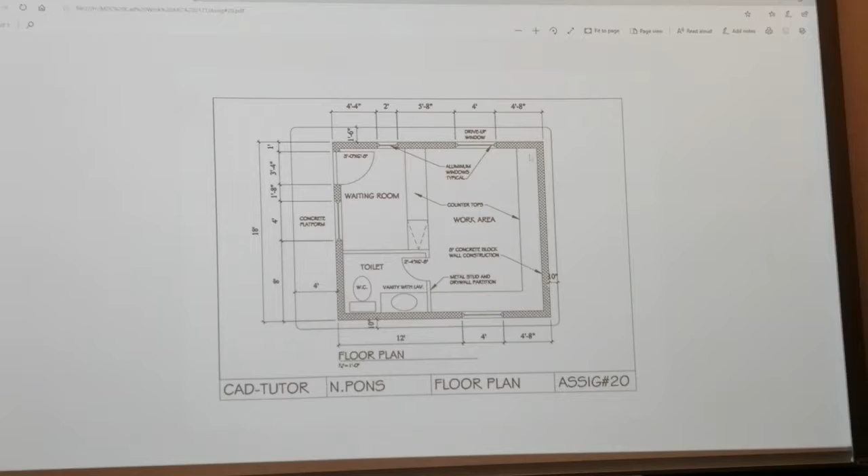This tabletop is 24 inches deep, same as this preparation table, 24 inches deep, which is 2 feet. This door you see is an upfolding door. The dash line means the hinges are on the narrow side of the line here.

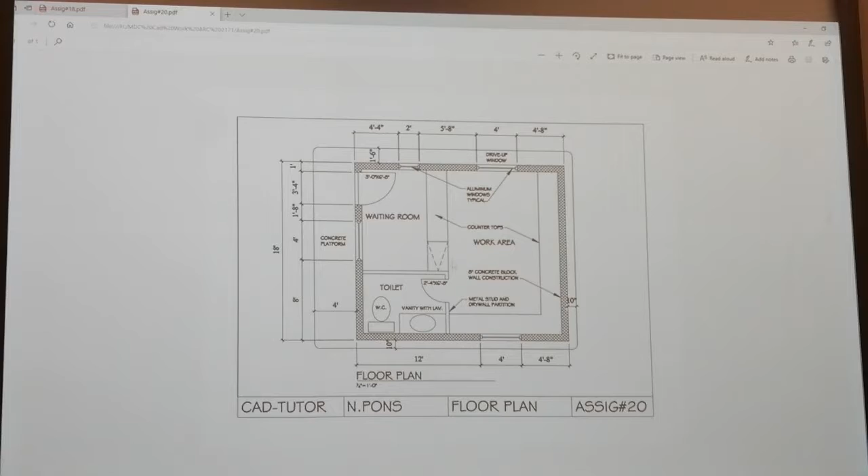So this is two feet deep by 3 feet long. What is 2 feet deep by 3 feet long? Can you print it so we can have it, the one door? Yeah, you'll have everything. Okay, and then you need to put dimensions.

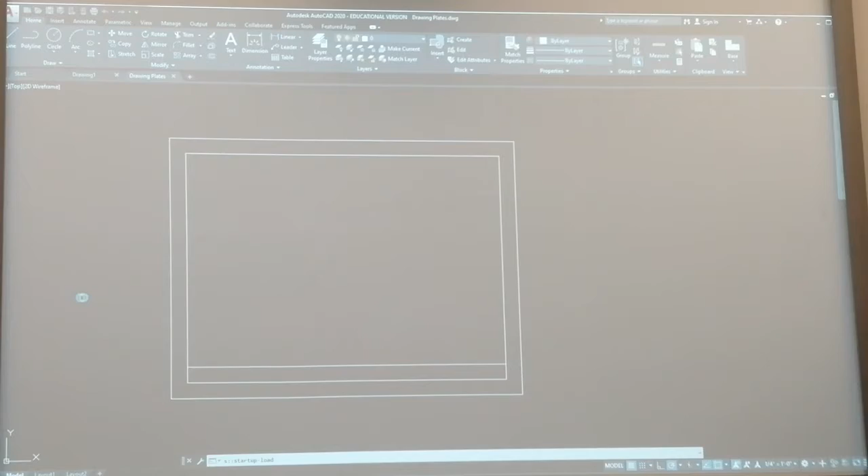Now let's take a look at the actual CAD of this.

I'm gonna put some dimensions here that you're gonna need to do. Can you all see? White, black and white. We're gonna put some dimensions here that you'll need in addition to all this, so I just set up my OSNAP settings here.

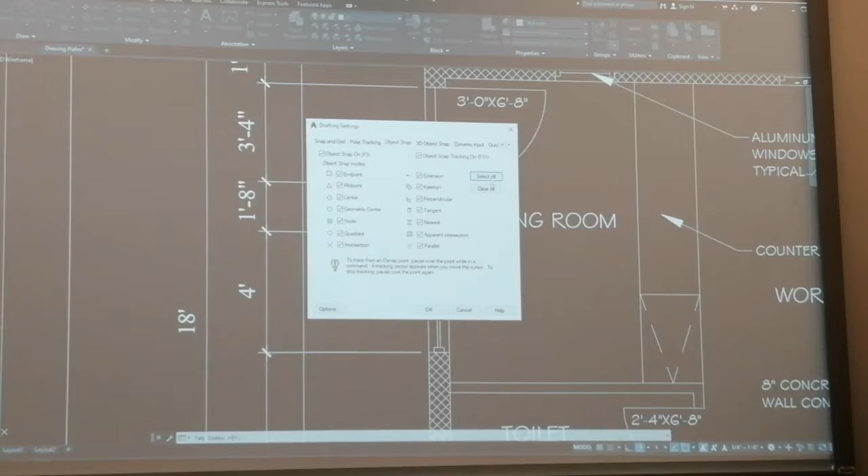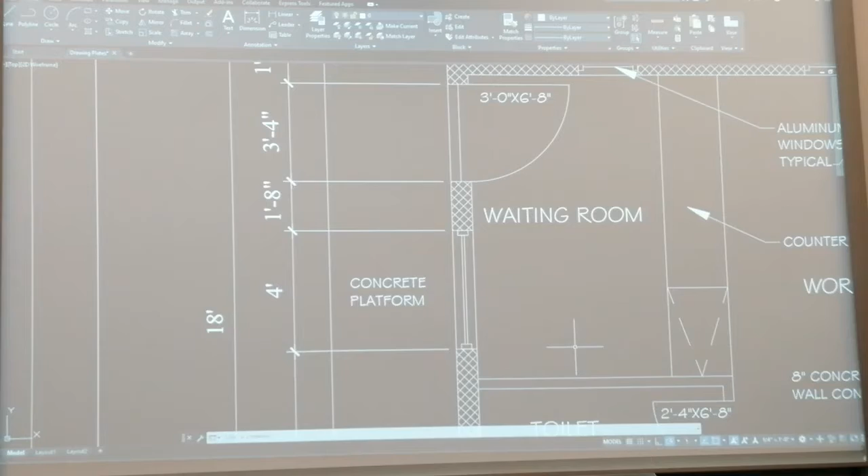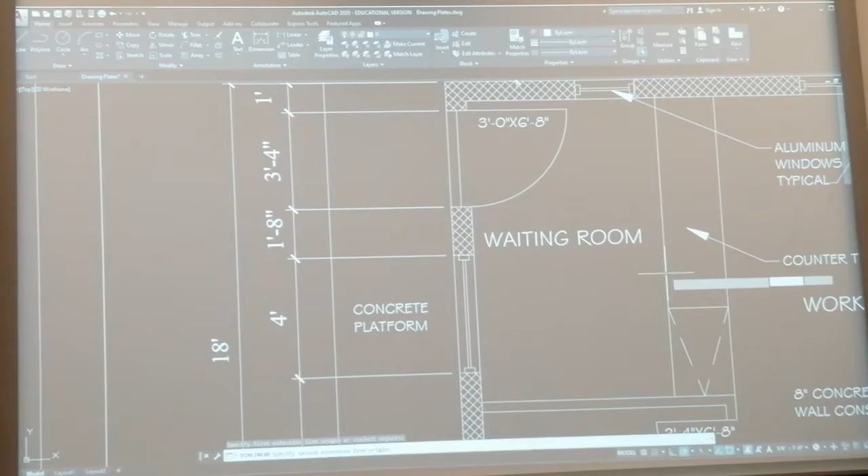Do you all have classes next Thursday, the 5th? No, wait, the 8th. Make sure you check, because I think that day is a conference day and there's no classes. Check with your department chairman, okay? Thursday the 8th. Not in the evening? All evening classes are rolling. Well, I gotta check and let you know. Our class is on Wednesday, you guys have to go, but I'll check anyways. These internal affairs and time off don't actually get put on the academic calendar from admissions or the registrar's office, so you won't see it on my syllabus. We never get told about this.

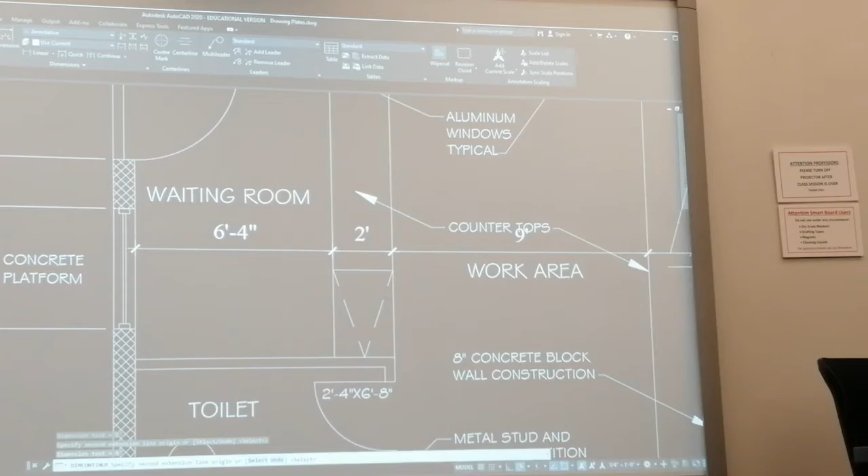Going back to this, I'm putting some dimensions here so you could have it, and you're gonna need to have it. You could see what I'm doing.

See a situation like this, never put the text over the number, okay? Never do that, that's a no-no. I'm gonna move this text here.

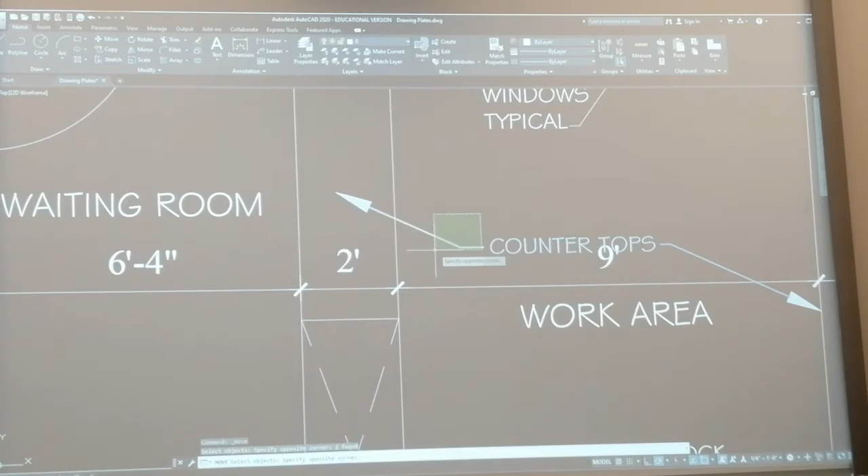Then what you need to do is put a dimension for the interior partition. You know what an interior partition is? A partition wall, yeah, it's an interior wall, right? Okay, some people don't know this, some students don't know this.

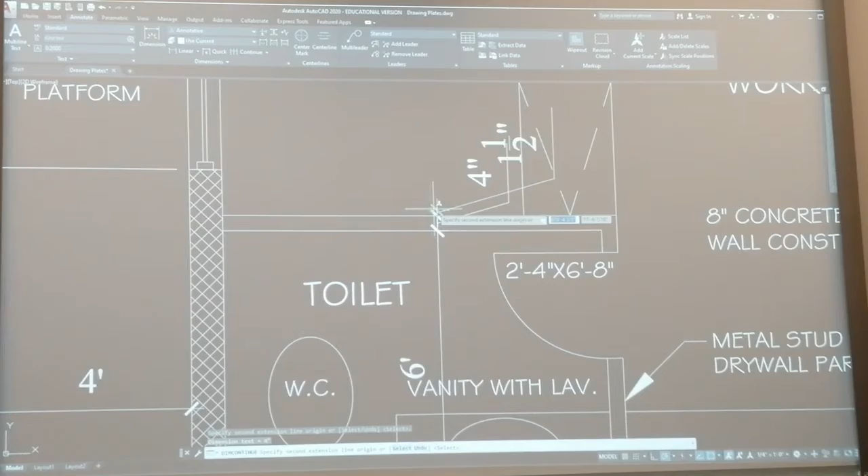Now you know that interior partitions could be either wood studs or metal studs, right? And metal studs are 3 and 5/8, the wood studs are 2x4s, but that's the nominal size. The actual size of the 2x4 is 1.5 by 3.5. Well, it looks like you're gonna need construction methods and materials.

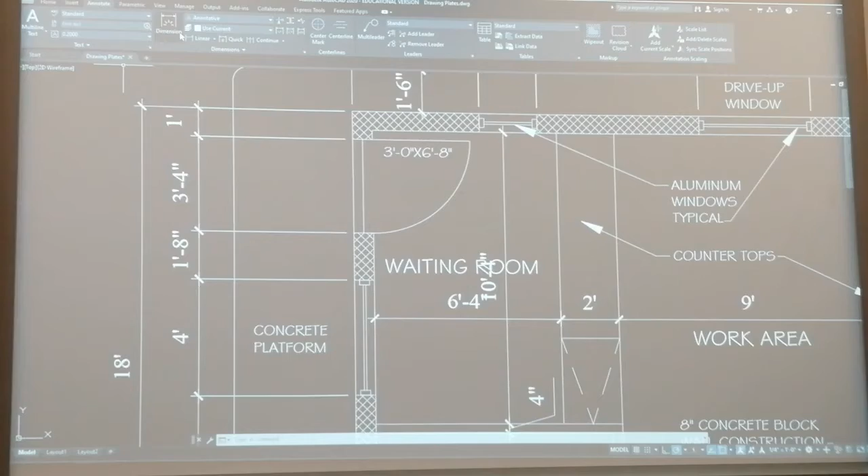When it comes to steel studs, do you have to use galvanized nails? You mean for the metal studs? Yeah. I remember metal studs come in different gauges. The higher the gauge, the flimsier and thinner they are. The lower the number, the thicker the gauge is. The gauge is the thickness of the metal.

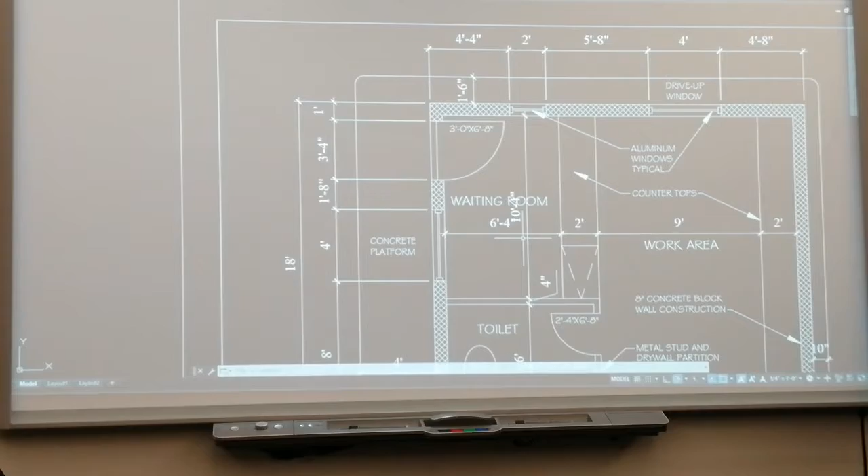We use a 20 gauge metal stud when you have a ceiling height over 8 feet, like this one here, about 10 or 12 feet, because it's high and tall. For an 8-footer metal stud, you could do away with 22 gauge and 24 gauge, okay? Typical.

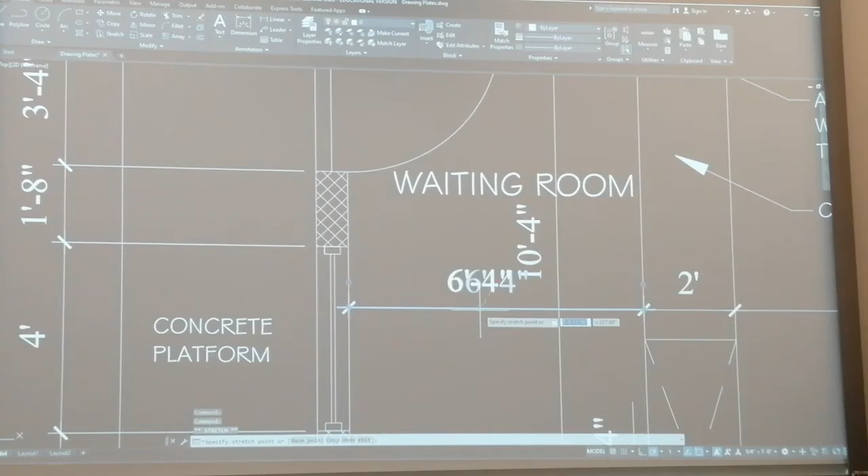See the way I'm separating the notes and then numbers, and also this one, you see how it's done. You don't want to cross over text with dimensions because it's not too clean to do that, okay? I'm gonna bring this one for you. This is extra information that isn't here, but I'm putting it in for you.

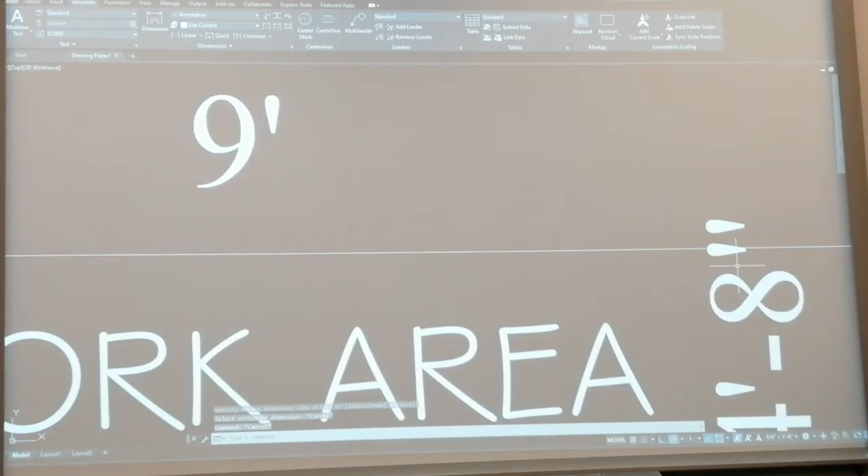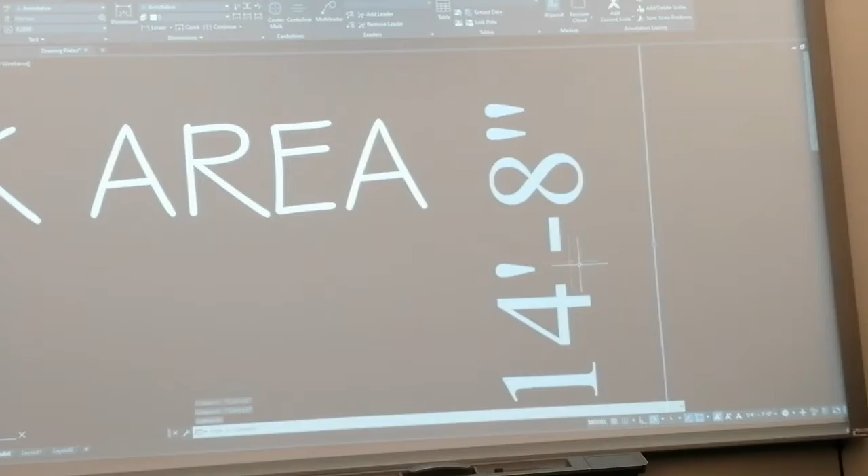Okay, so we got this, we got this, we got this. The door here with the blip, I'm gonna put the dimension there. And now I need another dimension this way for the restroom. So you first start with linear into the metal stud right here, you go over a little bit, over the toilet, try to get away from going over that.

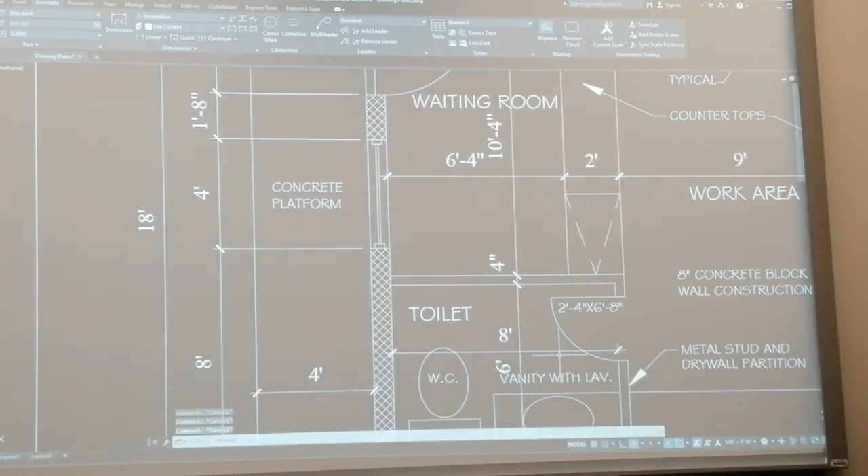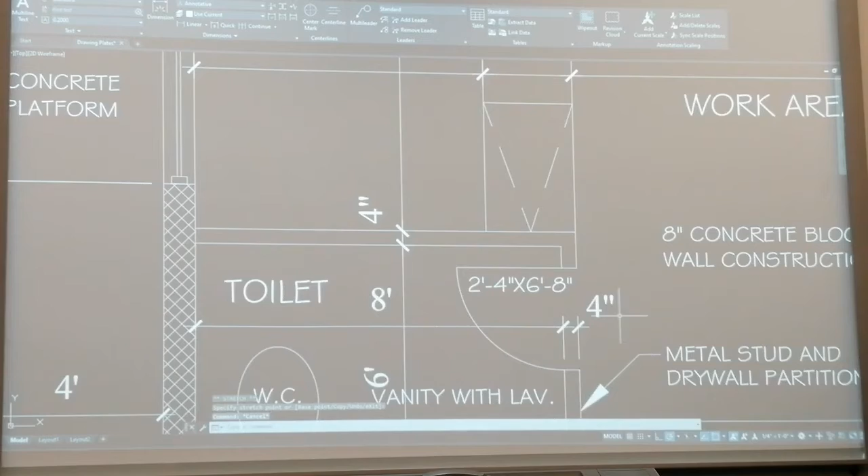Now the thickness will be 4 inches. For now it's okay, but in real life you'll need to put in 5 inches. If you're working in an office, instead of 4 it's a little bit unreal, because actually the interior partitions are measured from finish to finish. If you measure from the outside wall, it's rough, which is different.

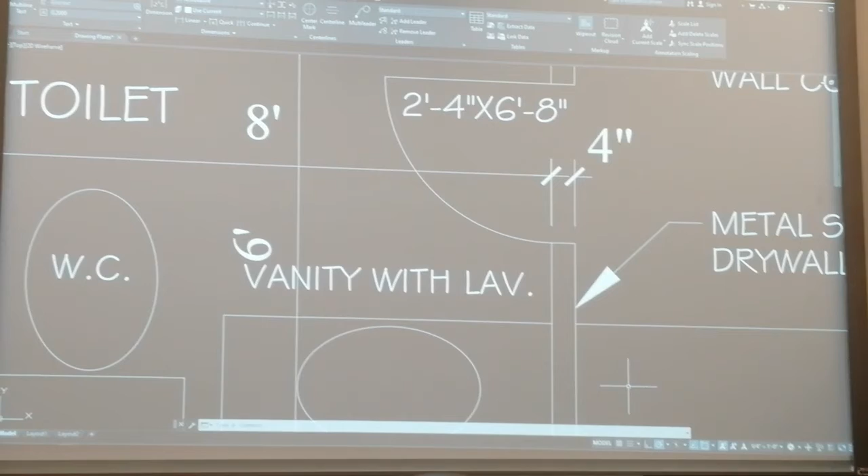Now finish will be 3 5/8 plus 5/8 and 5/8 on each side, because you got drywall on each side, so that adds up to almost 5. So you can't go wrong with 5 inches, remember that, okay? That's practice, it's not school. And the books won't tell you this.

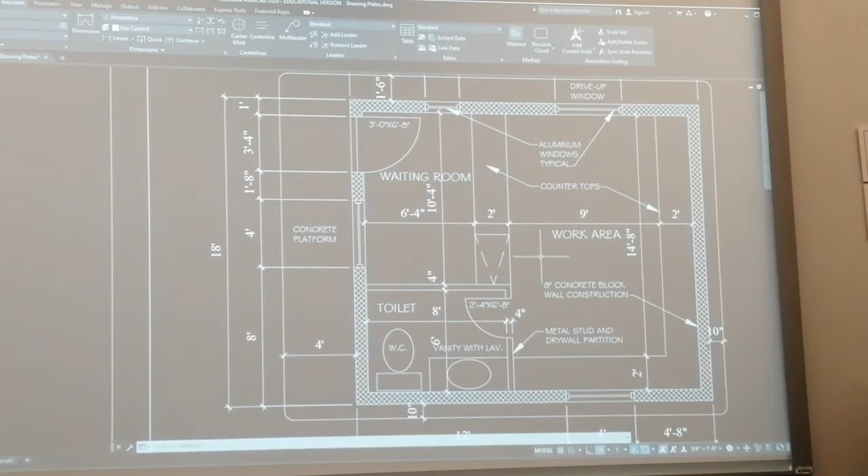So you got 8x6. You got the name of this: metal stud partition, drywall, and drywall partition, 8 inches concrete block wall construction. This is your work area, this is your toilet area, I would say, or restroom or bathroom.

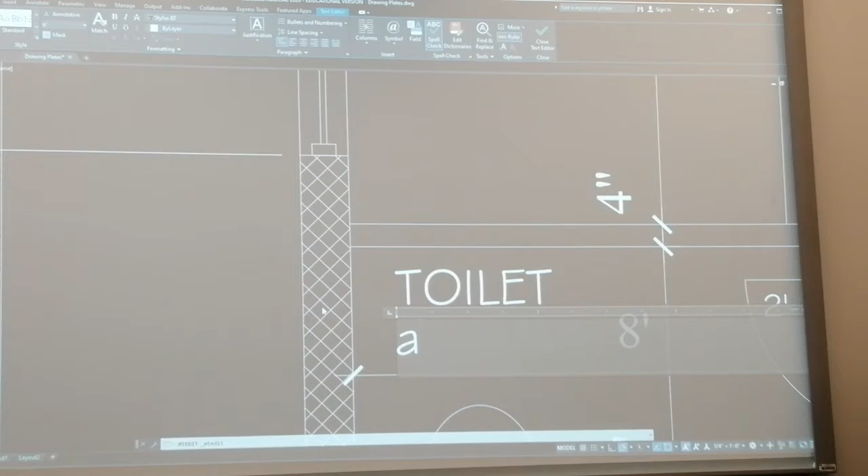You just have to be real, you know. Copy, highlight it, area, oops, okay.

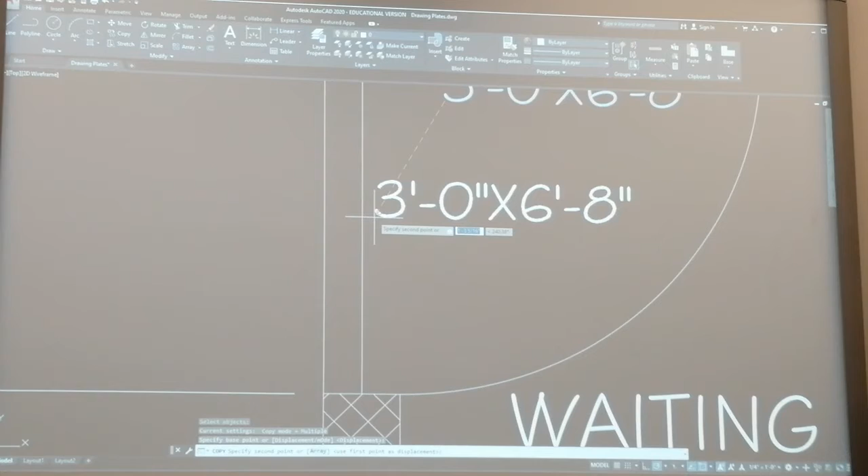You just need to put in, because this looks more like construction documents, MT, metal threshold. Okay, that will be enough.

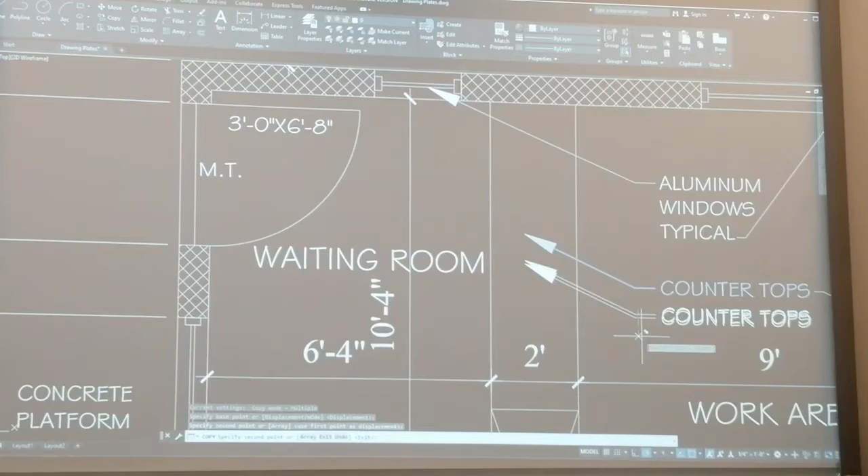And then, copy, okay, I wanna put in something here, this down, I'm gonna call it out.

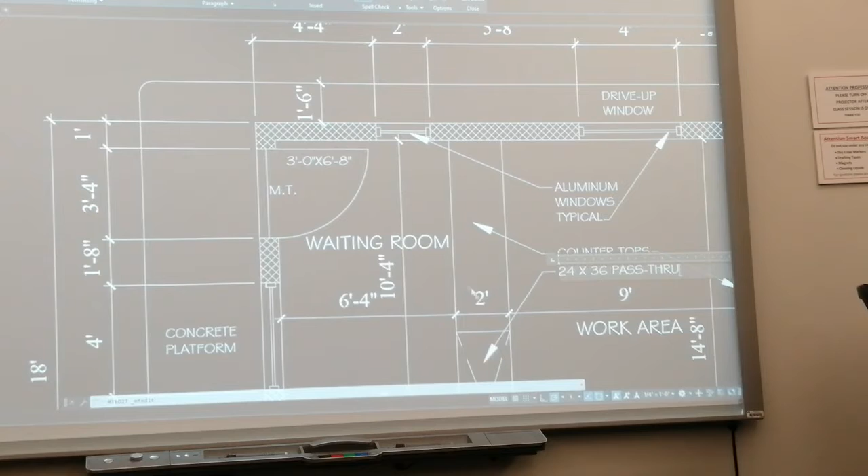24 inches by 36 inches, 24 by 36, pass through, pass through the door, okay.

This one we're gonna say... just modify it, that will be enough, 42 inches high.

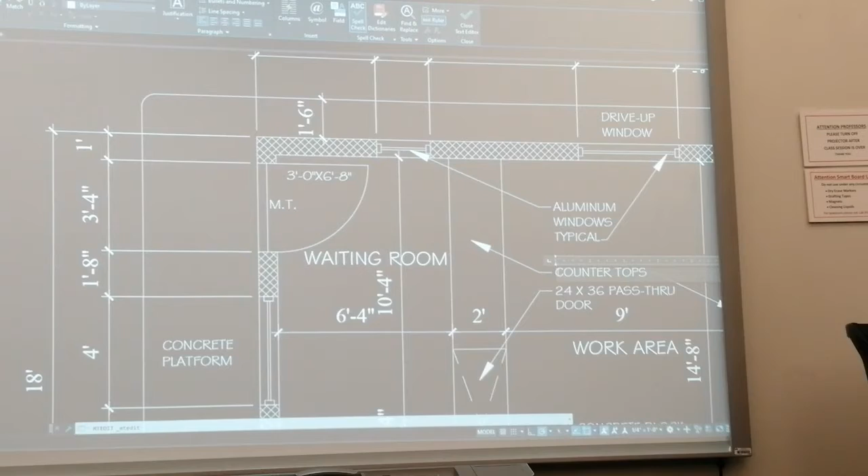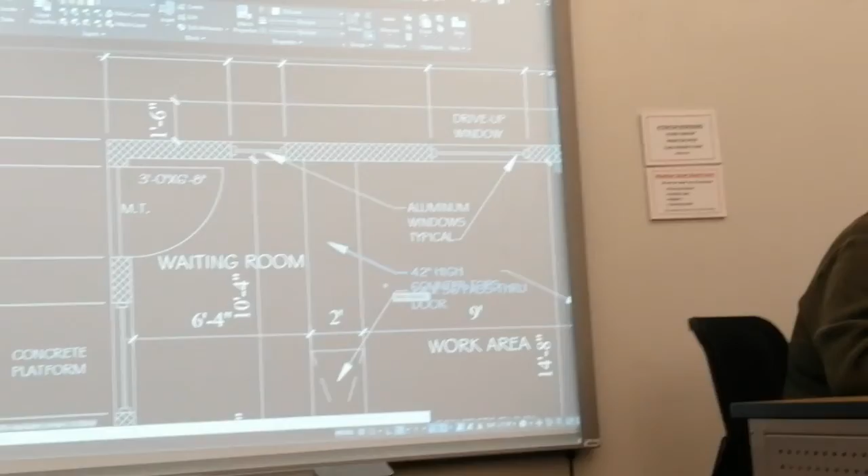Countertop. Okay, and then what I'll do is I'll move this a little bit higher to accommodate the note. Right click again, move. There, and that should do it.

42 inch high countertop. Okay, construction, what do we got? Drive up window, aluminum windows typical.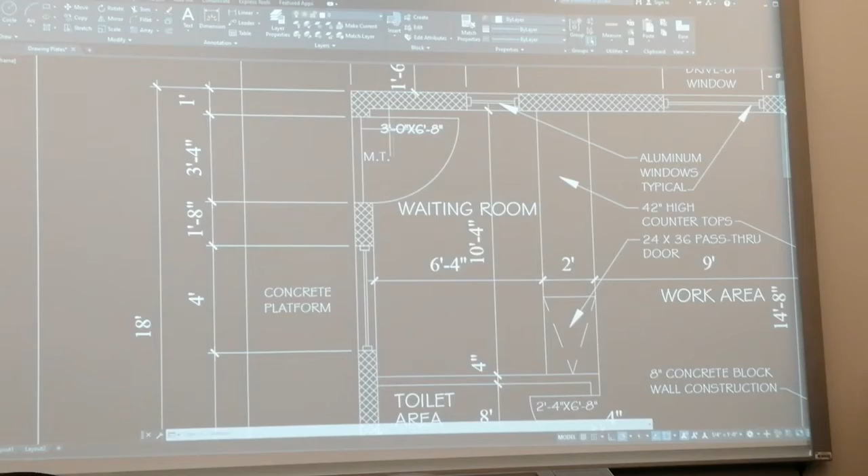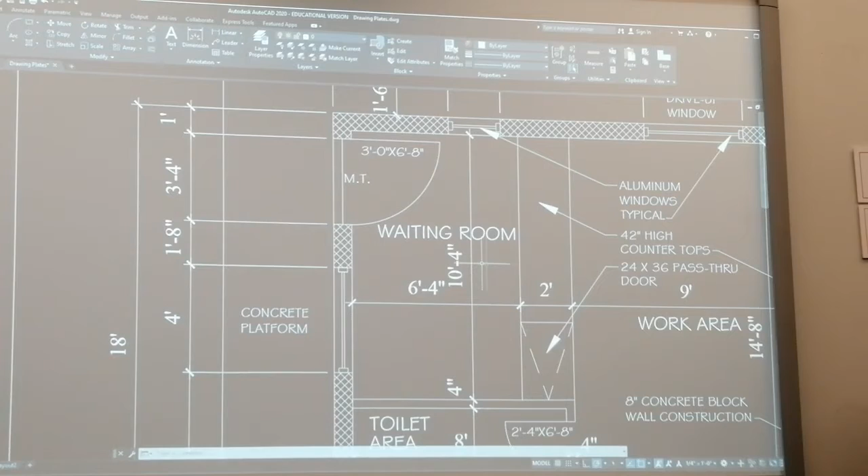You know that on the door, the first number is the width, the second number is the height, okay? 3-foot door, 3-0. Why a 3-4 if I'm saying 3-0? Because when I say 3-0, that's the door itself, okay? When I say 3-4, that's including the frame, 2 inches on each side. But for construction, you need to tell them the rough opening width, because otherwise the door is not gonna fit.

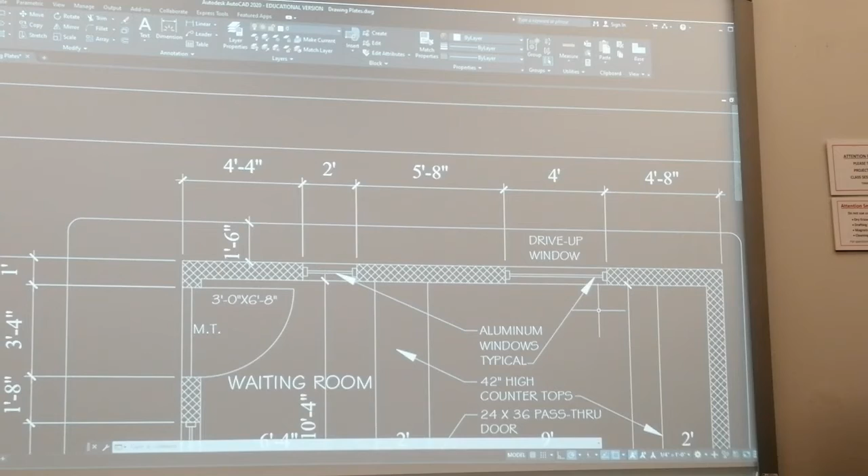In real life, you don't dimension the windows to the opening, the rough opening. You dimension to the center. Why? Because you're making the contractor be responsible, not you. But for the purpose of this school, it's fine, as long as you know the rule. This is called liability. For liability, you put a dimension to the center of the window, to the center of the door, no matter what. Have the contractor be responsible for the installation. That's what you're saying right there.

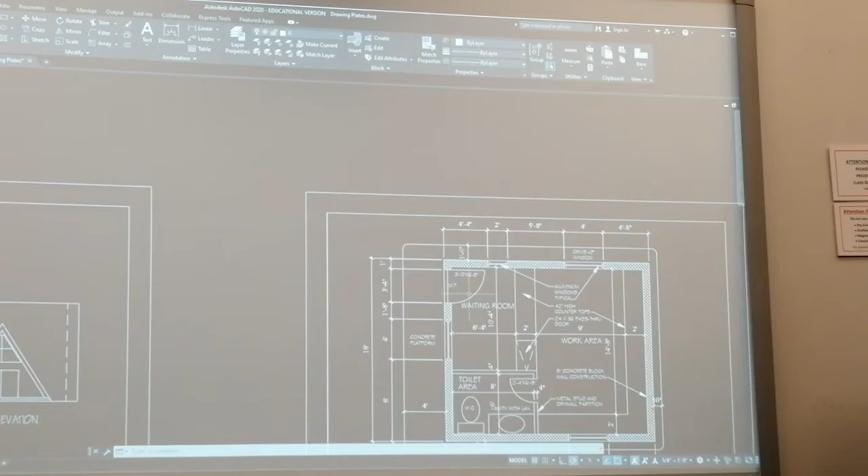You have to act like an attorney, right? You don't want that responsibility on top of you.

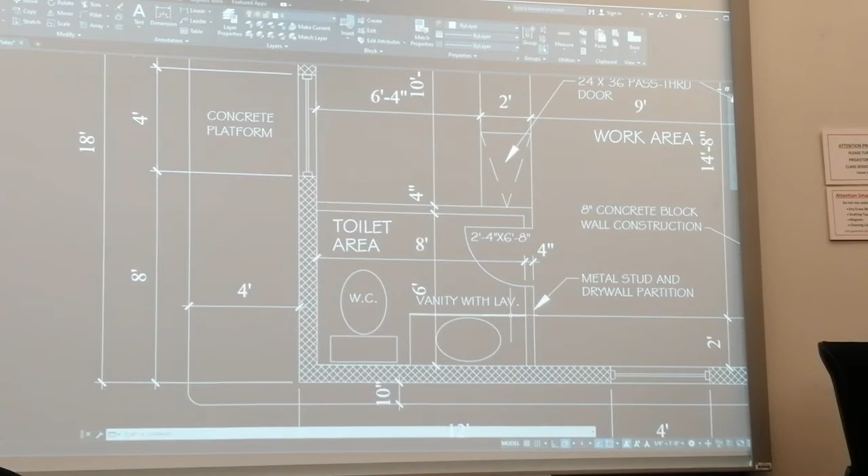Now here you got a water closet, which is a toilet with a tank, and you got a vanity furniture, and you got a bowl. We call this lavatory or bowl. Now you know your vanities, most of the time they are 24 inches, 20, 22, 24 inches deep. So you could design your own, you could bring anything from Waterworks. You could bring in a nice toilet if you want, you don't have to do this one exactly the same. You can play with it, I'll give you that.

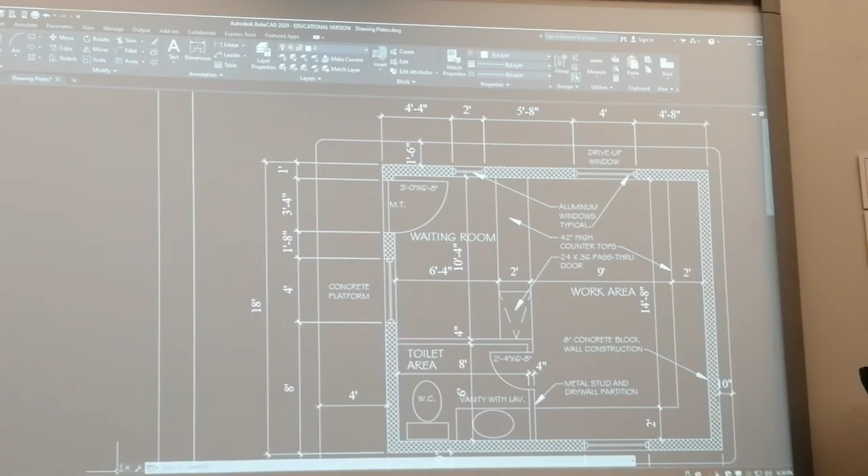And then over here you got a sidewalk. This is the drive-up window. This is where the girl stands up and gets your cash. And sometimes you get upset because they don't put the chicken or the stuff you want or the hamburgers, right? Most of the time you gotta check everything because sometimes they go fast and by the time you drive up to the next block, there's your food missing. By the time you return it, it's all cold. Then you'll be fuming like me.

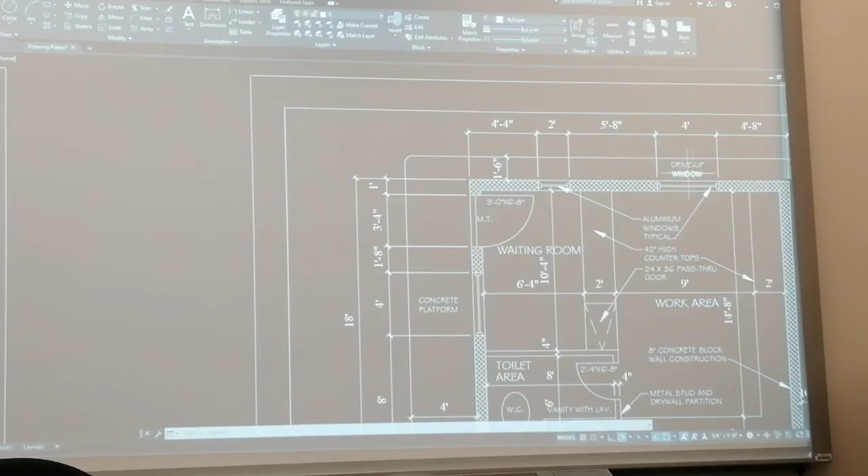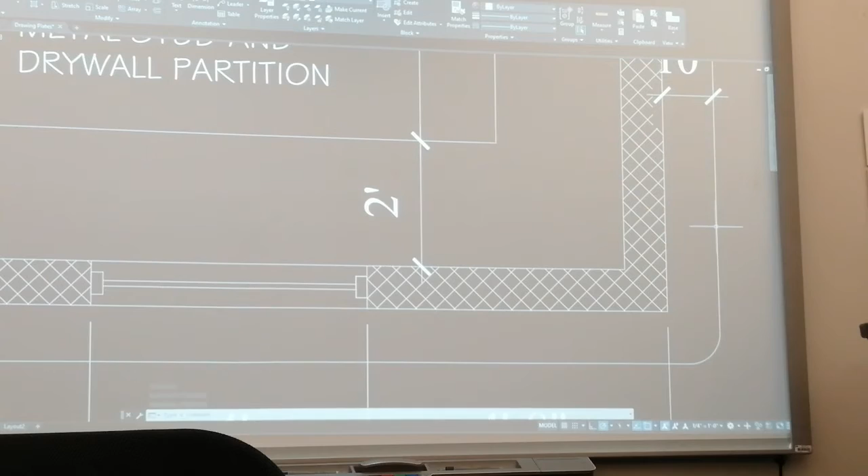And then how do you do the curve? With, what is the command that you use for fillet? Chamfer? Fillet, okay, and then you put the radius. You wanna make it a little bit wider, it's fine, it's even better. That way, when you do it like this, you're trying to protect this corner from a car jumping over it, hitting the block wall.

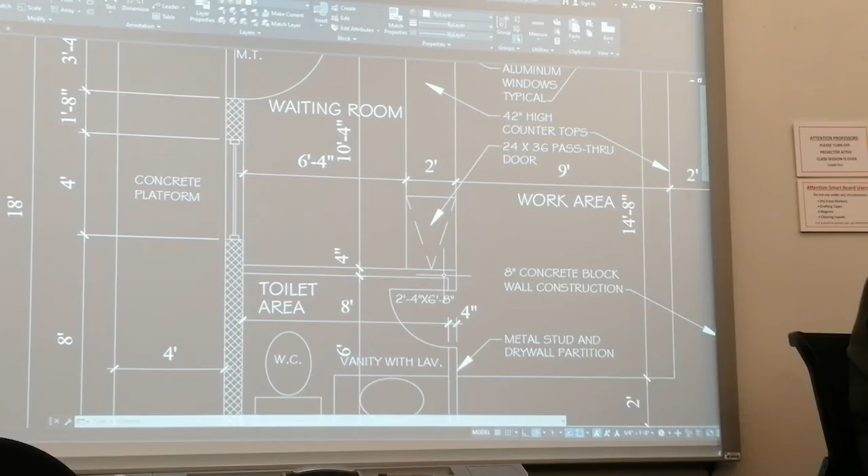Okay, so you got 24 by 36 pass-through door, 42 inch countertops, aluminum windows typical. I think, okay, this door is 2'4" width by 6'8". Now how many of you are interior designers?

Okay, you know that when you install the door, you need a casing, right? You know what a casing is? It's a vertical trim right next to the jamb. Okay, this is a casing. See this little lip here? You never put the door against the wall there, because you need to put a casing.

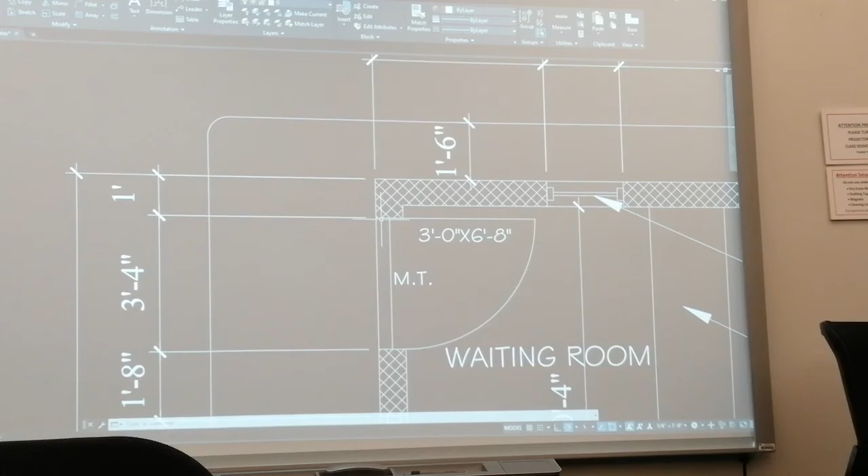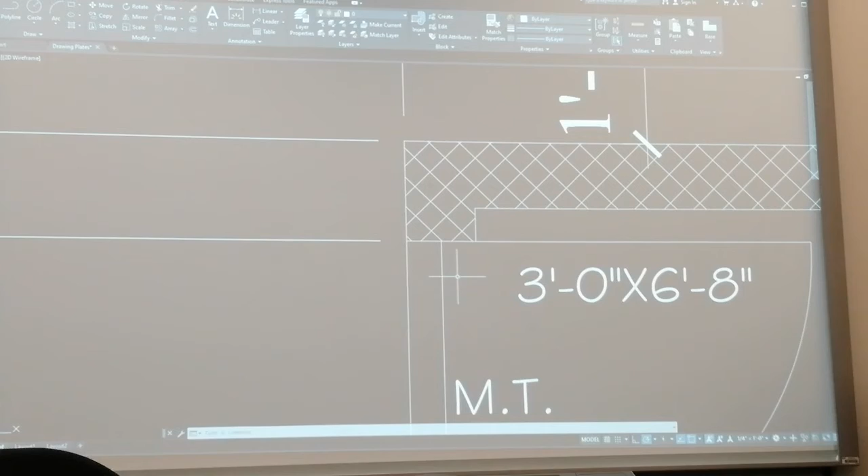If you figure that your dimension is a foot to here, that means that the lip is 4 inches. Why? Because the width of the concrete block is 8 inches, okay? So you need a minimum of 4 inches. 3 inches is not much. If you're gonna design a modern apartment in Bal Harbour, or Miami Beach, or South Beach, and you're doing a modern roof without a casing, then you could go 3 inches. But you need a return, okay.

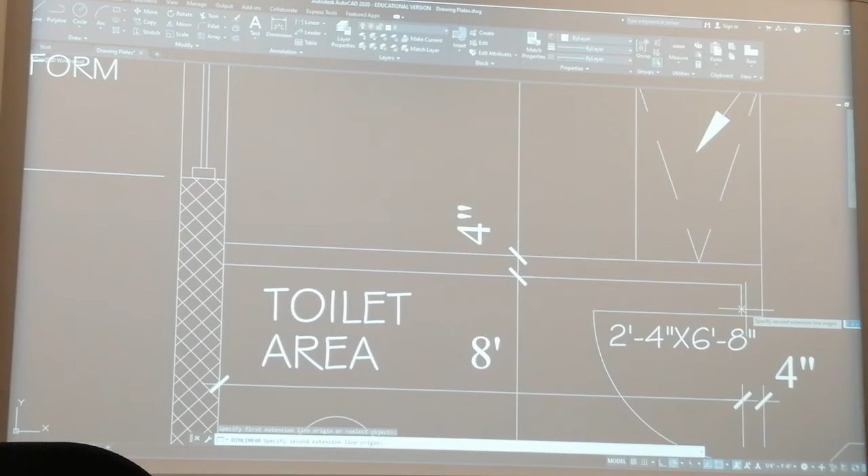Like, so for example, what is the return for this one here? Minimum of 4, right? I told you, including interior partition. 6 inches, okay, that's fair enough. So, okay, any questions on this?

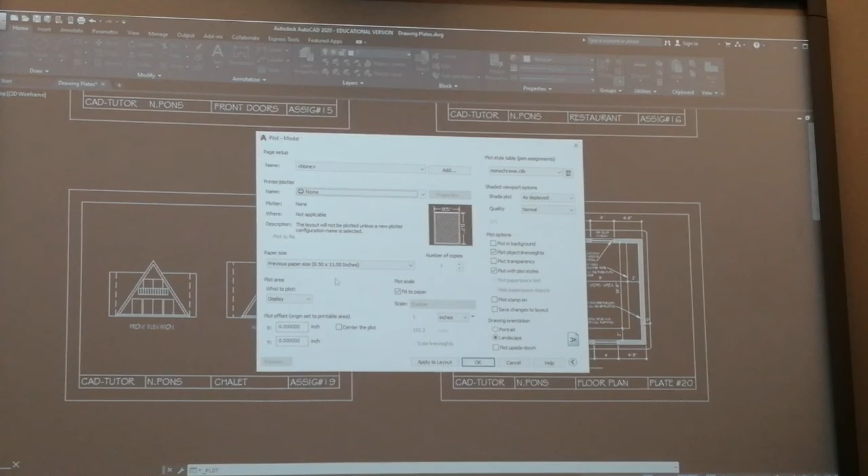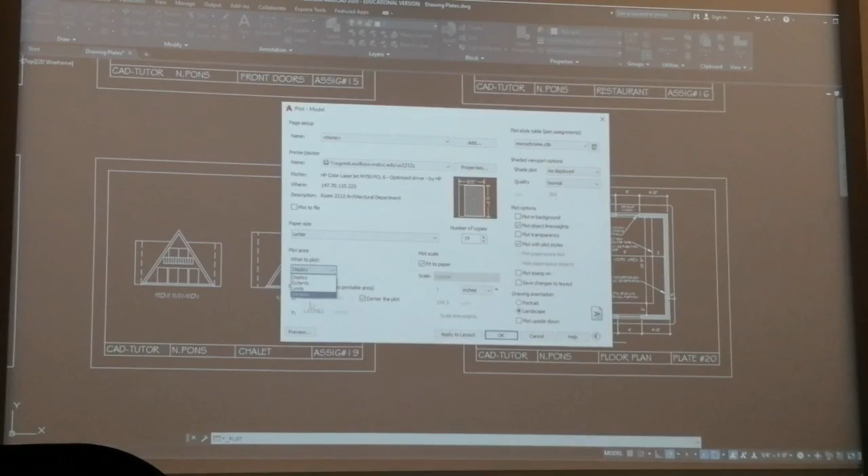Let me just print this over. Center the plot, we're gonna do 19 of these, so you know, we have a pretty full house here. And then I want to do a window running between the space between the border on the title block and the border. So preview. Ah, very good.

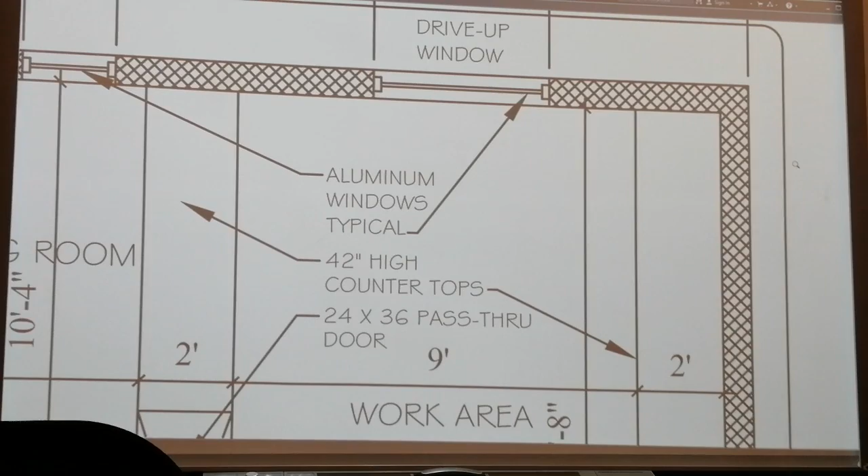Now don't forget to put line weight, okay? I'm not gonna do it on this one. Put the line weight on the outside of the block, okay? The hatching, you could put in concrete, you could put in sand, you could put anything you like, okay? I'm not gonna take points off because of this, okay? Make sure you put your name, don't put mine.